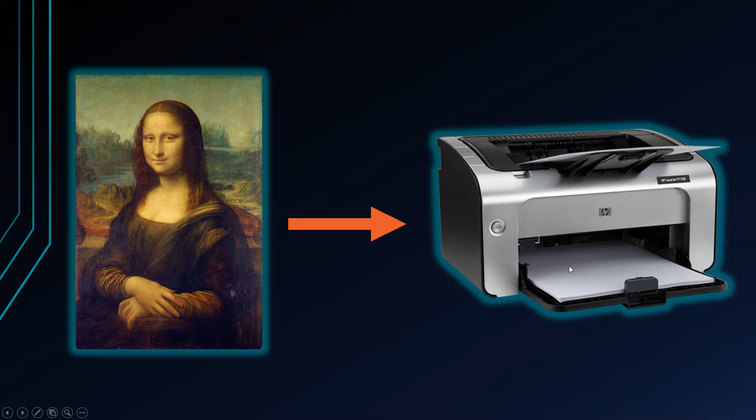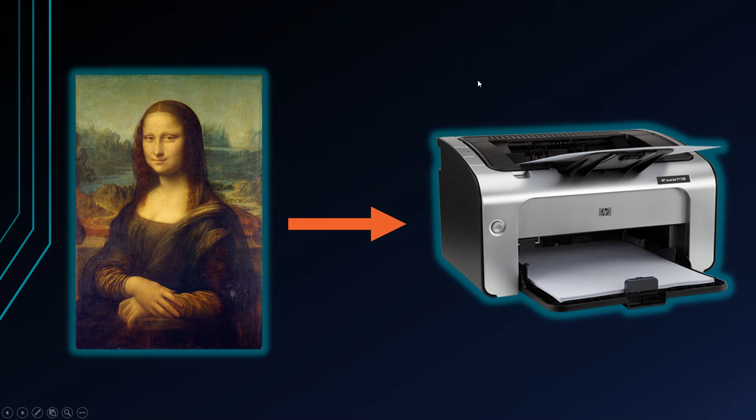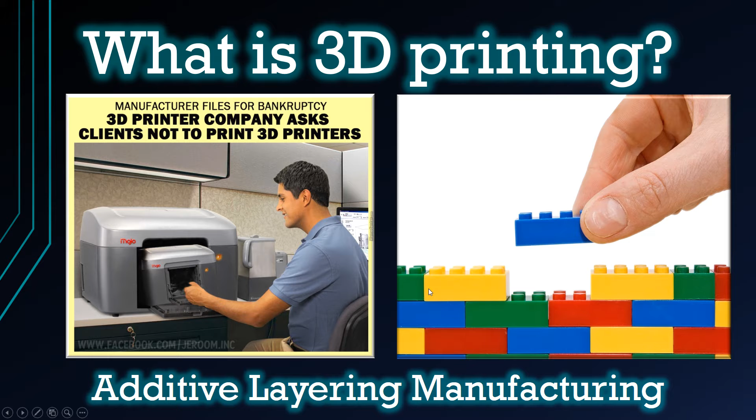It's taking plastic and layering it one layer on top of another, much like stacking Legos. The technical term is called additive layering manufacturing.

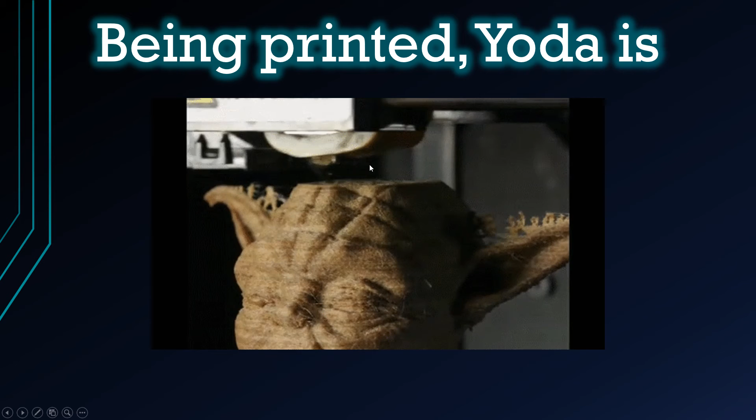So here is a very quick little video here of Yoda being printed to show you what it looks like fast forward. Now, prints print much slower than this, but you see how it's adding it layer by layer.

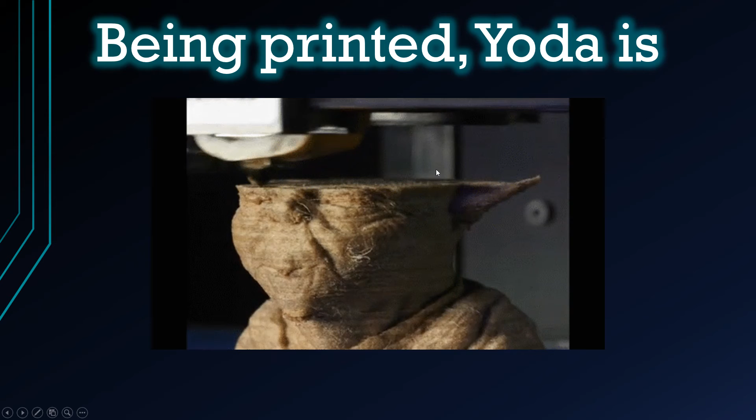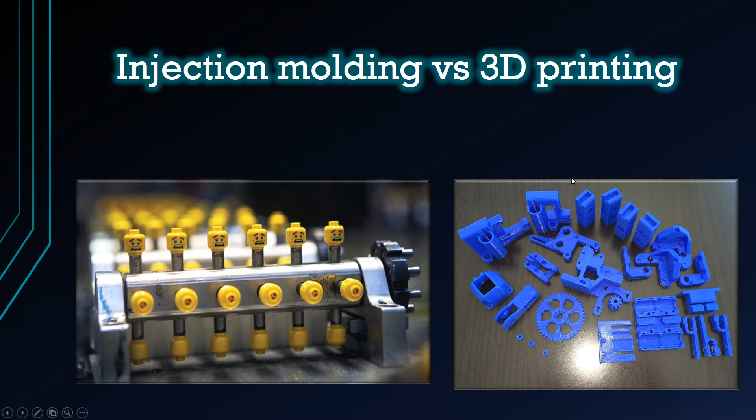I want to go over how there are some similar forms of manufacturing, such as injection molding and milling. To compare injection molding versus 3D printing: with injection molding you have a mold and you shoot all the plastic in just in one go, and you wait for it to cool down, and you separate the mold. This is good for mass production of the same part, whereas 3D printing is good for making very specific one-time only parts. So if you were making a robot with 100 different parts, it's much better to use 3D printing. But if you were to print 100 of the same robot, and you need a specific part, then it's better to just injection mold 100 of the same part.

Now, 3D printing versus milling. Milling is actually quite opposite of 3D printing. You got a block of material, and you have a drill bit, and you mill away the material, unlike 3D printing. Milling is faster when you have a much bigger part and you only need to take off not too much material. But with 3D printing, you can actually make it hollow. So there's pros and cons for using the different forms of manufacturing.

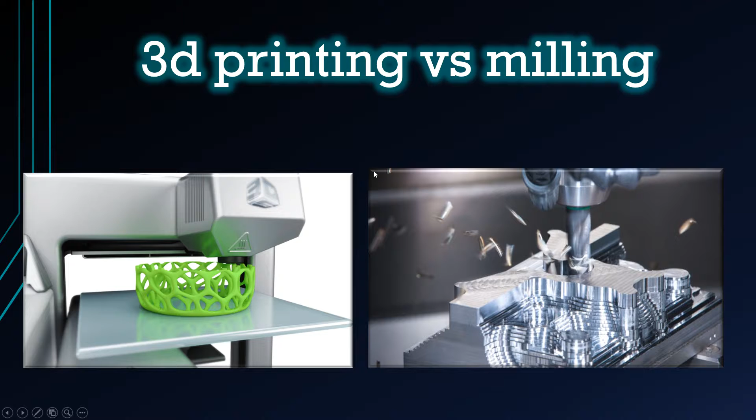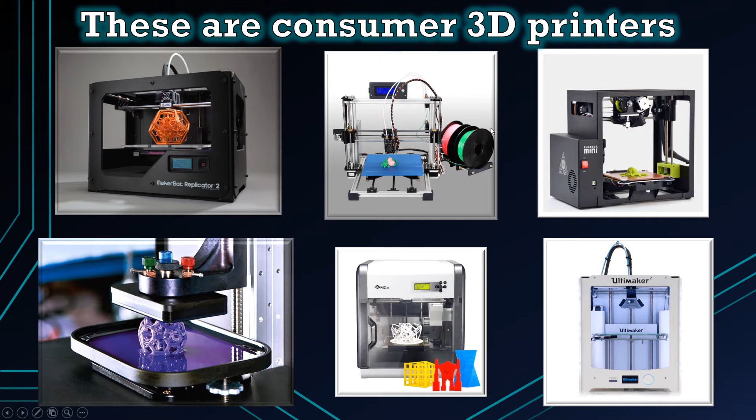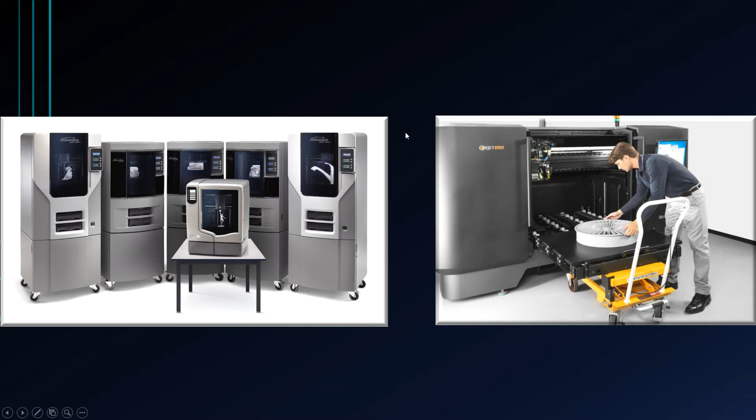So 3D printers come in all sorts of shapes and sizes, and home or consumer 3D printers have really caught on in the last couple of years. But I want you to know that there are also industrial 3D printers that are much bigger. They can print faster, they can print much higher quality prints, and with many other materials that a home 3D printer might not be able to 3D print with.

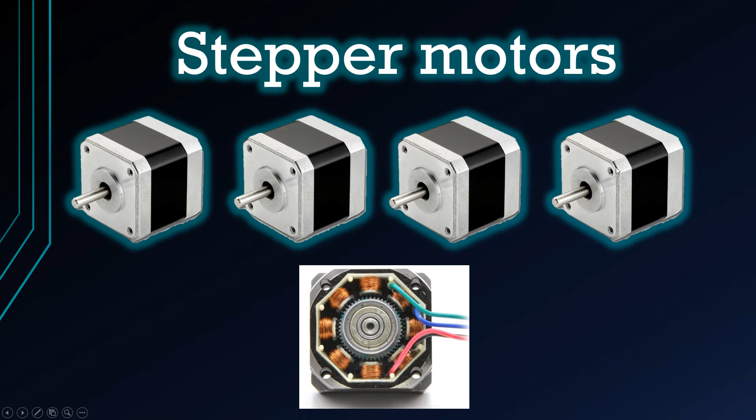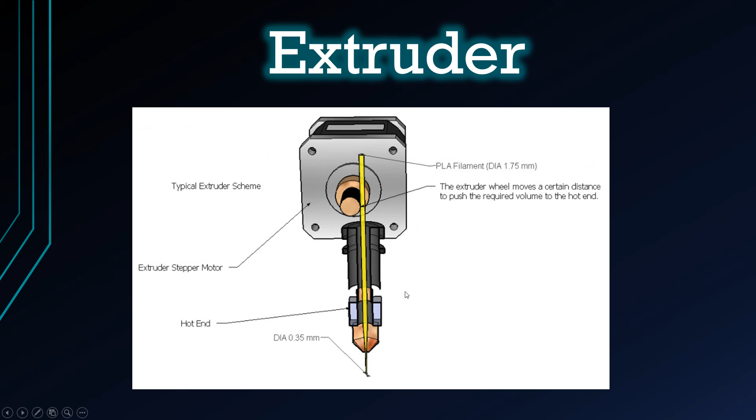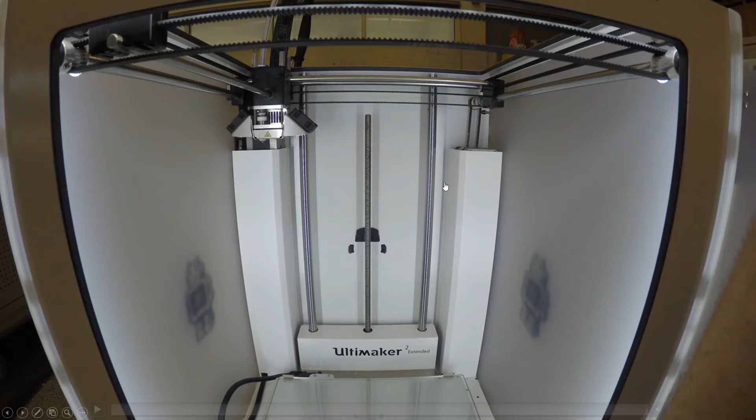Let's see what else we have. Here's a quick video I show people about how the extruder has to heat up at first.

This particular 3D printer has two fans. Even though the plastic starts to cool down as soon as it leaves the extruder, these two fans blow air to help it cool much faster.

Another benefit of this particular 3D printer is it has a heated print bed, so it keeps the plastic adhered to the bottom. Some printers don't have heated print beds, so you'd have to use a lot of glue and tape to keep it stuck to the bottom so your print doesn't accidentally come off in the middle.

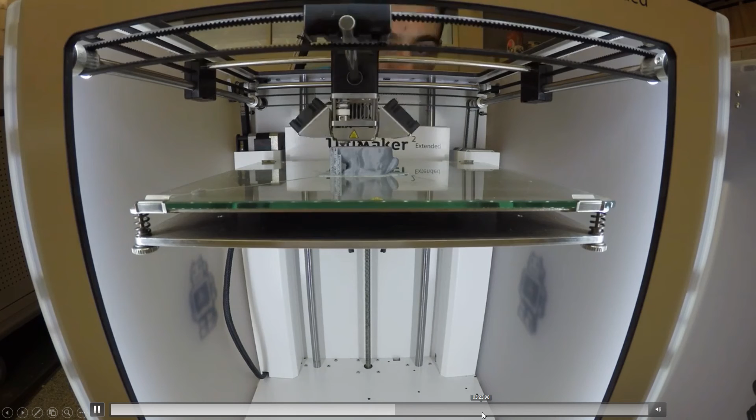So let's take a look at printing. Let me fast forward. You see how, with due time, it prints a rabbit. Now, to a class, I would let this run for the full length, but I'm just speeding through this.

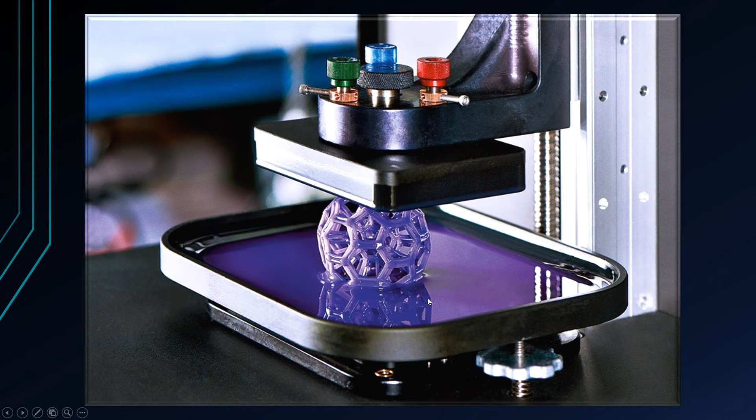The other type of 3D printer is called a resin 3D printer, in which it's already in a liquid state. I believe it uses a projector to project the image, and the print bed pulls it up and out, which is really cool. I haven't dealt with these, but they're another really cool 3D printer that exists.

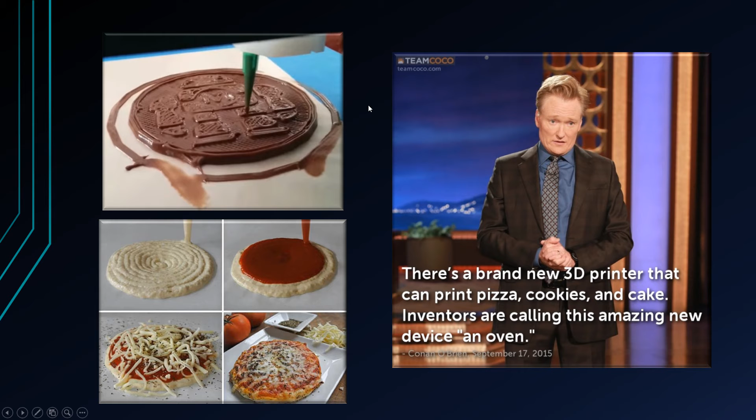There are food 3D printers that can print with chocolate and pizza and such. I don't know if they've been improved. I don't think there's any consumer version out right now, I think it was just a concept someone came up with.

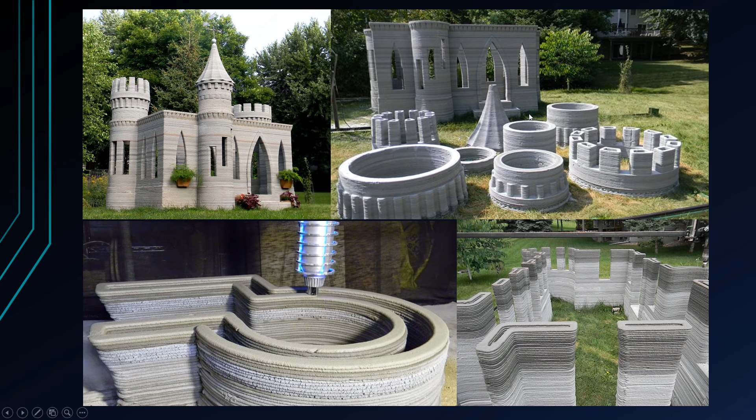Cars—as far as I know, just the body of the car was 3D printed, and everything else still needed to be assembled. But it's really cool. And I know there was a guy who printed his daughter a castle out of concrete.

There was another company that printed houses on the spot. The concept of printing a house has been around, but with the castle, the guy needed to print it at a different location and then assemble it on site, whereas this new concept for a house has the printer print the house on site, so you don't have to move any parts, which is really cool.

The biggest one right now that gets a lot of traction is prosthetics. If you're missing an arm, we've gotten really good, to the point where we could just print you a new arm. A lot of universities are doing that now.

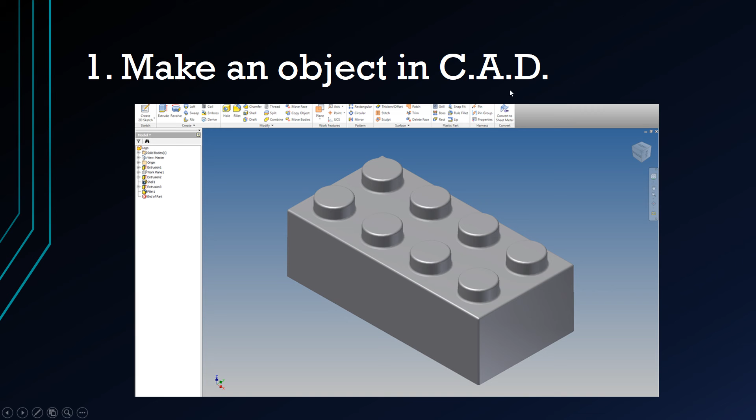There's a thing called CAD, Computer Aided Design, in which you have an environment where you make a shape. Most things you want to 3D print can be broken down into basic lines, squares, circles, and triangles. If you look at these shapes, you can see how you can break all these things down into their basic shapes.

The one I start students off on is called Tinkercad. It's a free CAD software online, and it uses something called Boolean operations. The two top ones out there that I know of are Autodesk Inventor and SolidWorks. I use Autodesk Inventor, which you can get a free student edition for, and SolidWorks is really, really good too, but I can't get a free student edition of it.

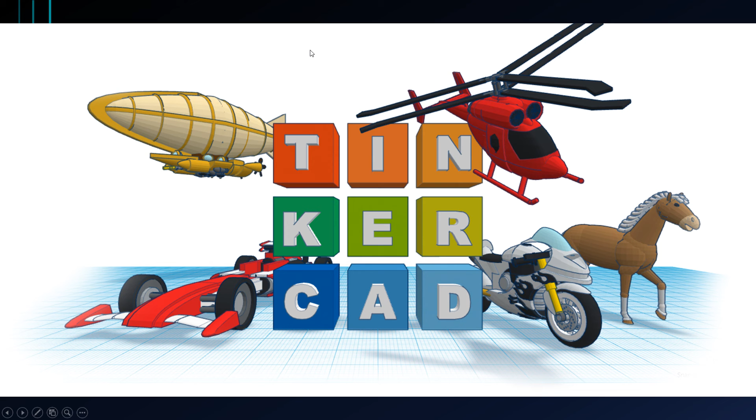So Tinkercad, for beginners who just want to start designing basic things, you can just drag shapes in there and form some stuff. The Boolean operations I was describing: you have a palette of 3D shapes to the right, and you can combine them in such a way that you get cool, unique shapes you couldn't otherwise.

Here's a quick one where I made a house where I dragged a box in and a roof, and what I did was make the house, then did a Boolean remove to remove the material that was right there to say house. I actually have this 3D printed, which I'll show in a later video.

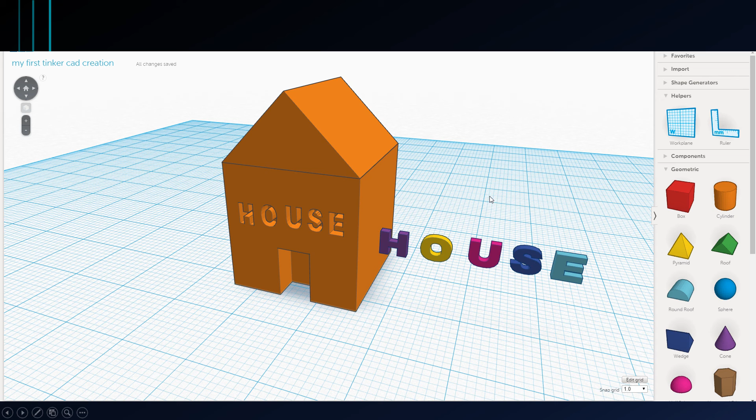So, how to get your design to the 3D printer. This is just the button pressing part of it. Now that you've learned what they are, how they work, and some basic ways to make your own designs, it's how do you get these 3D models to the 3D printer.

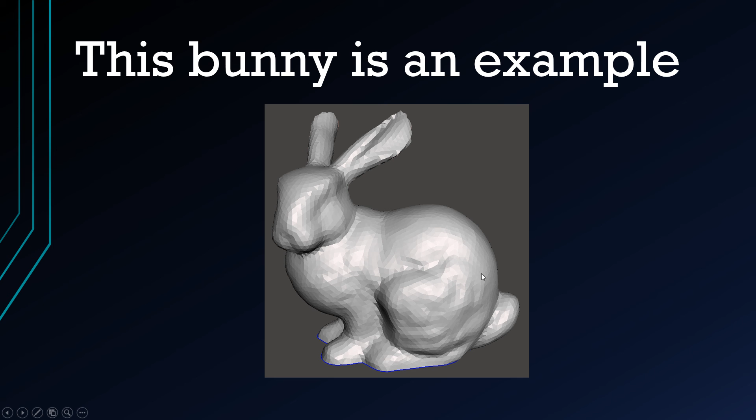So picture this bunny is the thing you made. What you have to do is get it into an STL file. Every single CAD or 3D shaping software out there can convert to STL, which stands for Standard Triangle Language. It's like the universal currency of all CAD programs. You can import and export as triangles.

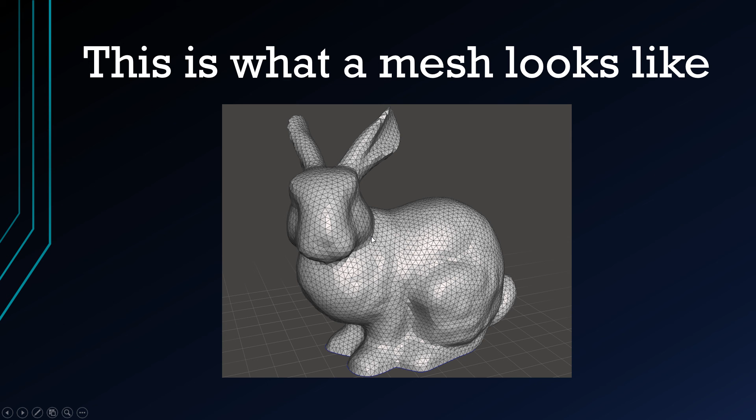This is what it looks like, and when you have your 3D file as just an STL, it is referred to as a mesh of triangles. So this is what your bunny looks like.

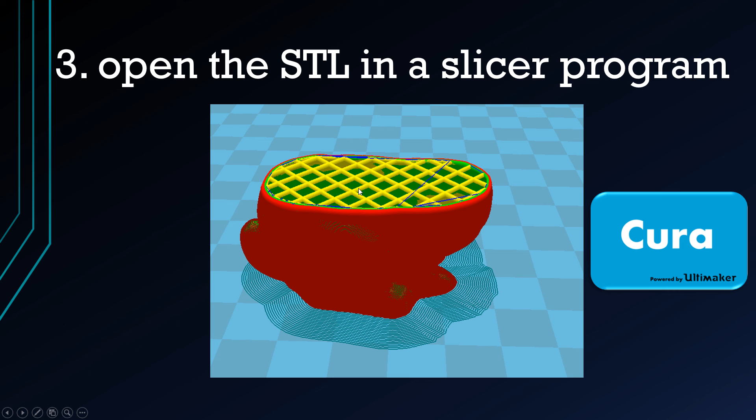You get your STL into a slicer program. For Ultimaker, the one I use, the slicer program is called Cura. I think Cura can convert so you can print with other 3D printers, and there are other slicer programs that can do the same, but the one you typically use for the Ultimaker is Cura. This is the print preview software of the 3D printing world, where you can see what it's going to look like when you're about to 3D print it. You can see this yellow right here - your prints most of the time are hollow inside.

When you save through the slicer program, it's saved as something called G-code. It's just a text document with coordinates on it, and those coordinates tell the machine where to move. The other machines that would use G-code are anything that uses stepper motors, like this mill right here - or rather not a mill, but a CNC router - and a robotic arm. A lot of the times these use stepper motors.

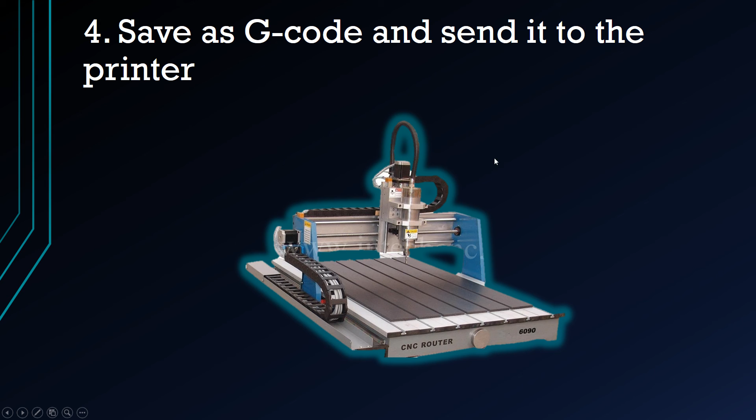So in the case of the Ultimaker, you have to save your G-code onto an SD card and just put it in the printer and press print.

So there is everything you need to know about 3D printing, from concept to finished product.